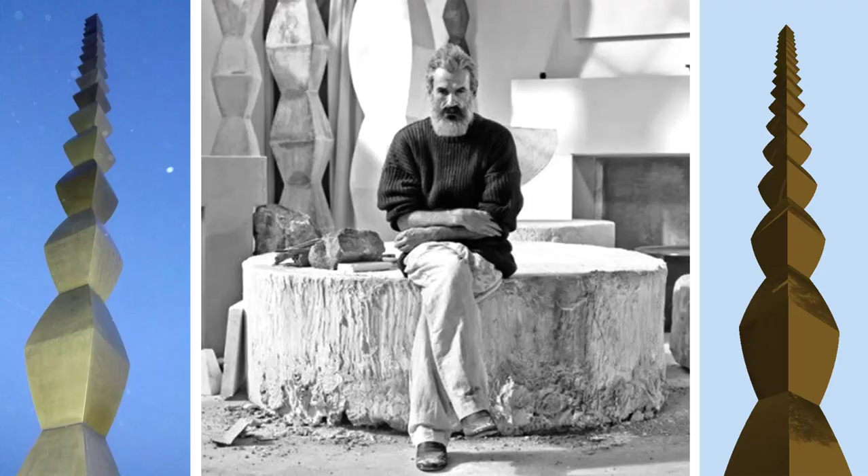Hi my friends, today we model this object of art made by the Romanian sculptor Constantin Brancusi.

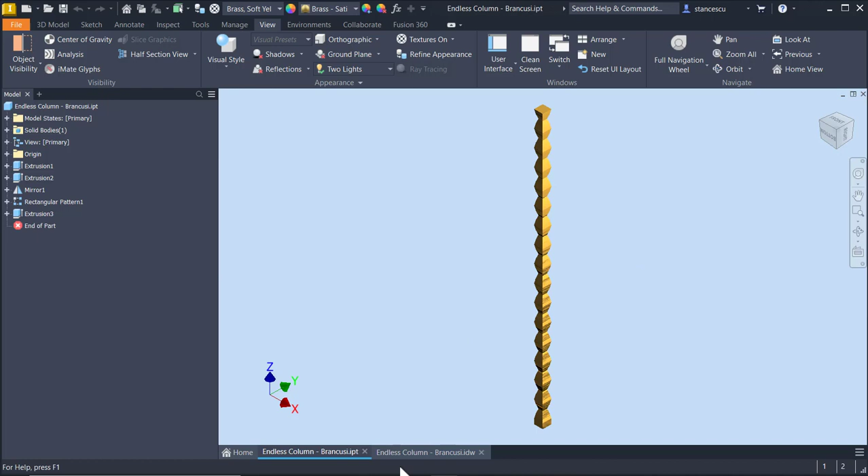The drawing is here. The name of the sculpture is the Endless Column, in Romanian coloana fără sfârșit, which is placed in Târgu Jiu, a town in Romania. It was made in 1938. Dimensions are here, we'll discuss about them.

But now I want to show you the author of this art object, Constantin Brancusi, who is a pioneer in modern art.

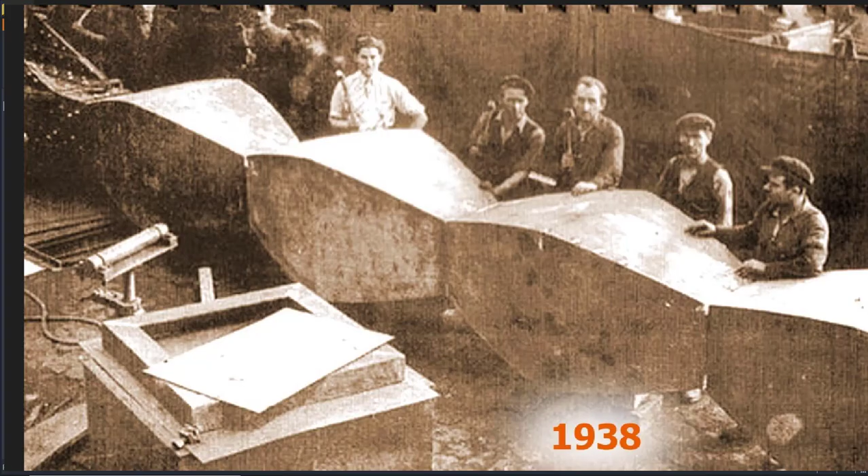This is the column placed in a park of the town Târgu Jiu. You see, it seems to be endless. This is how it was created by workers in metal, finished in 1938.

Another masterpiece of Brancusi is the Gate of the Kiss. Gate of the Kiss is in the back. This alley is the Alley of Chairs, and this is the Table of Silence with 12 chairs around. You can see that this seems to be a clepsydra, as well as the column.

All these masterpieces are placed in Târgu Jiu on a single line. Here is the column, here is an Orthodox church. It was the motive for Brancusi to create these sculptures: the Kiss Gate, the Chairs Alley, and at the river Jiu, the Table of Silence.

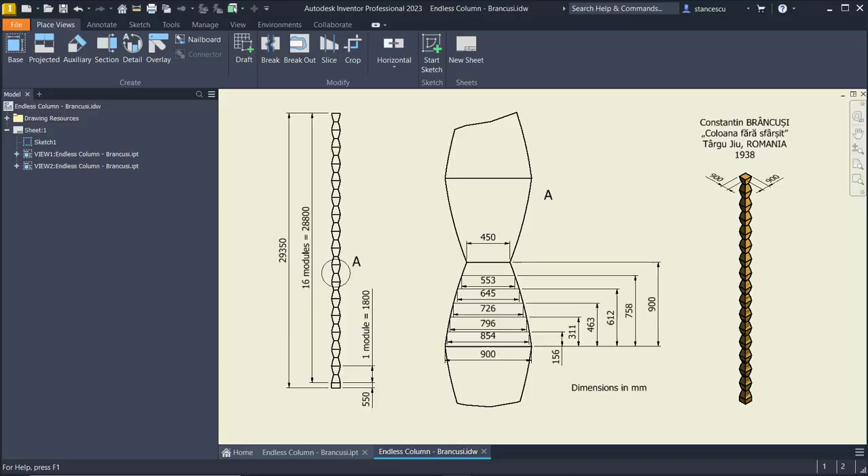Before moving on to modeling the column, please watch a short clip. It is a sequence from the film named Film Prezentare Gorj by Radu Tora, which you can find on YouTube under this name.

The Romanian Constantin Brancusi from Gorj, considered the father of modern sculpture, gave Târgu Jiu an invaluable creation. A symbol of the victorious passing through the gate of life, the Kiss Gate seems a passing gateway toward another realm. The motif of the union between man and woman was polished by Brancusi into the essence of the idea of kiss. There are 12 clepsydras at the silence table, 12 stools, one for each hour of the day or night, one for each apostle, and in the middle a round table, perfect, brought from the ancient world of the Romanian village. The endless column is a world axis, meant to support the celestial dome forever, to elevate the spirit, to enter eternity. Brancusi said, 'Go, cuddle the infinity column with wide open palms. Then, raising your eyes, look at it, and you will thus know the essence of the sky.' Probably the best known creation of Brancusi, the endless column, is considered to be the top of modern art and also the artistic symbol of Romania. Admiration for his genius and the desire to know his origins guide many tourists to Hobița, the native village of the man who made Romania known all over the world. Brancusi Memorial House shelters interesting aspects of the village life in Gorj, the art of working wood, which is representative of the craft of carving, traditional beams and pillars in Gorj, which Brancusi based his creation upon.

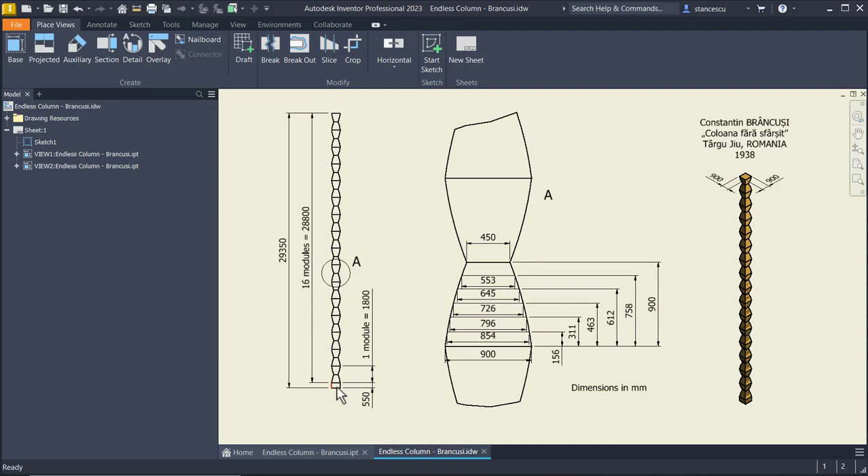Now let's start with modeling. We start by creating this bottom pedestal, which has dimensions of 900 by 900 by 550.

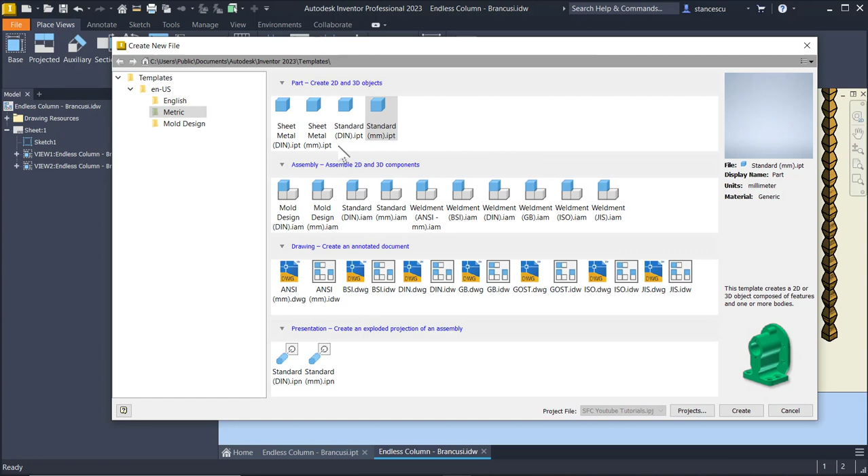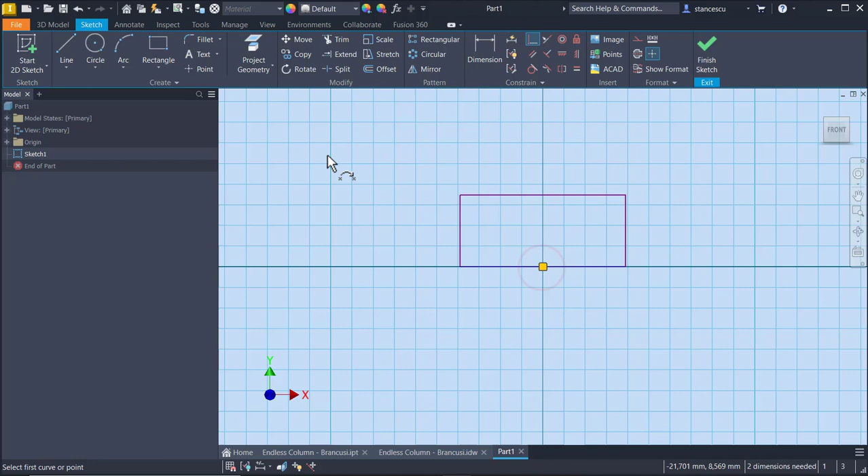We start by creating a sketch on a plane XY, a rectangle with its center point on the center point of the work. This is 550, this is 900. Finish sketch.

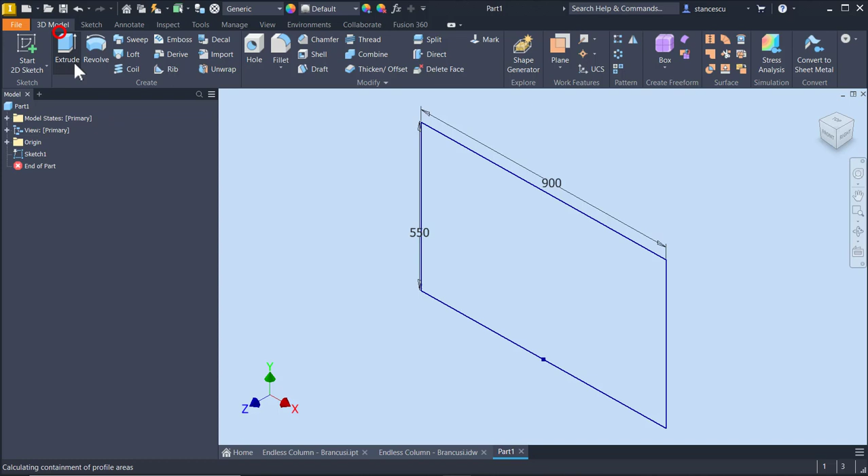Extrude, symmetrical, also 900, and we have the first feature.

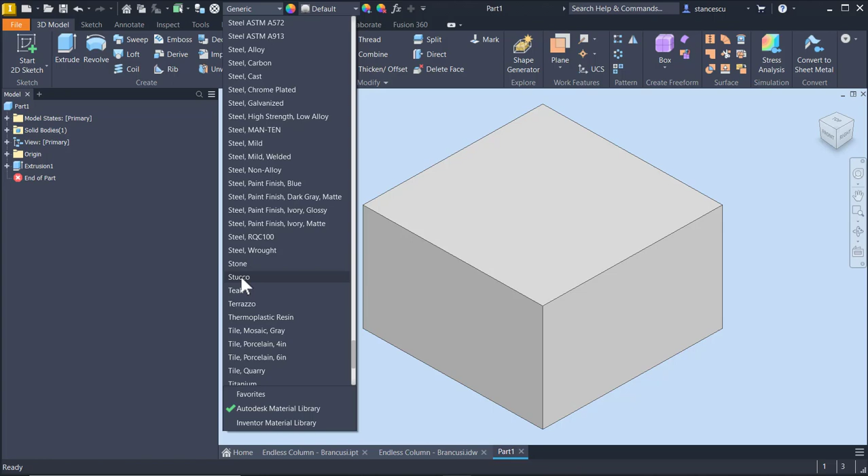We select here from Autodesk Material Library the material stone. Stone is right here, stucco. Stone is not so appropriate, but this seems to be like the material of the column.

We create a new sketch in the same plane.

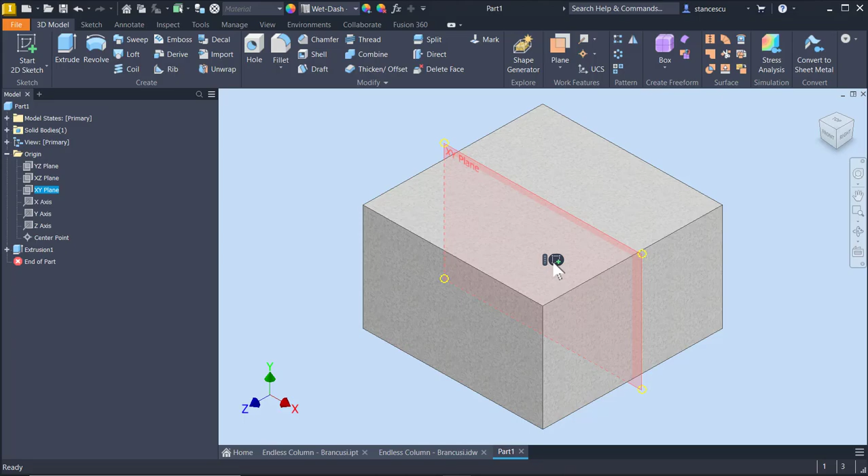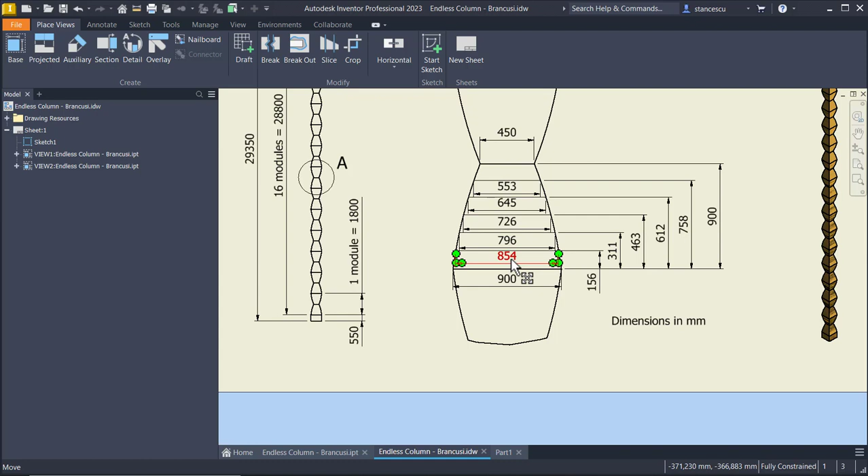We project this face, and now we apply these dimensions: 900, 450, and here there are five other dimensions placed at other heights.

We use this, so let's place points: 1, 2, 3, 4, 5, 6. Then we project as center line the axis Y.

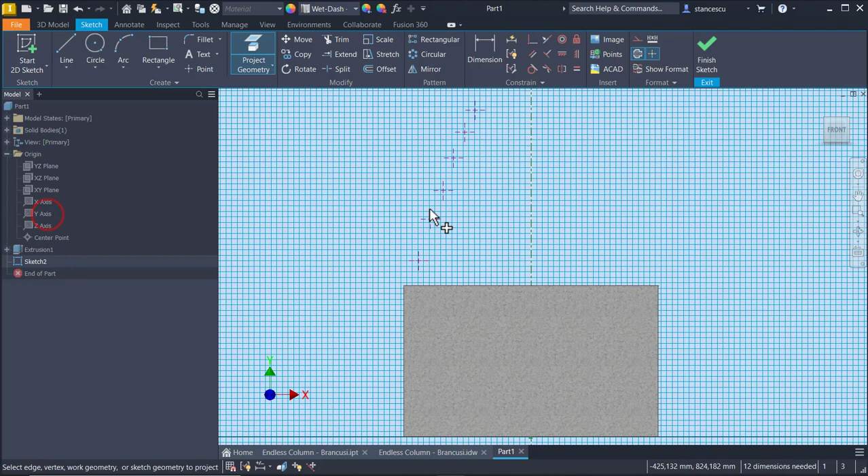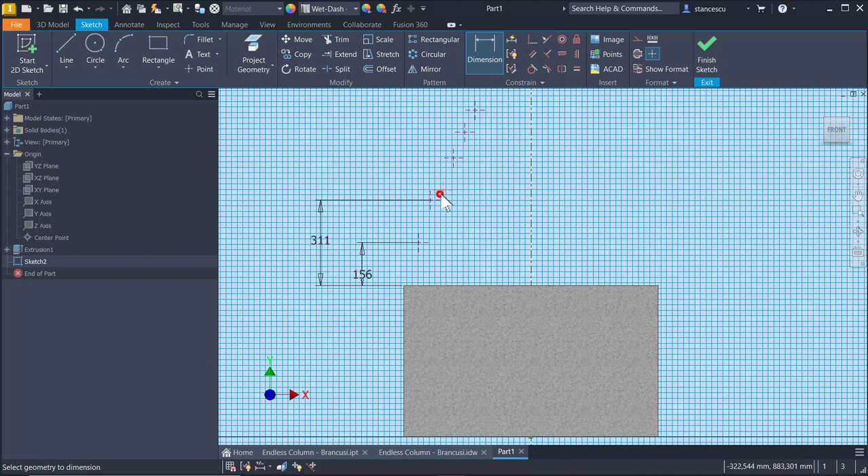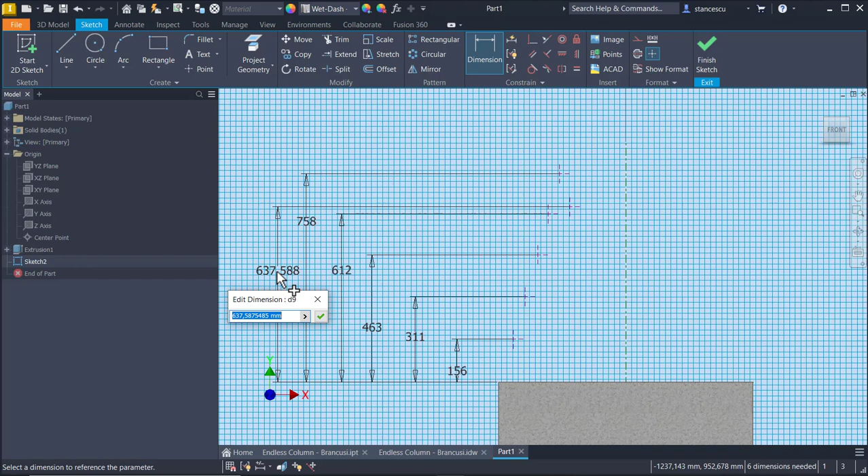You see the center line here. Then dimensions: this is 156, then 311, then 463, then 612, then 758, and the last is 900, because this is an important dimension all over.

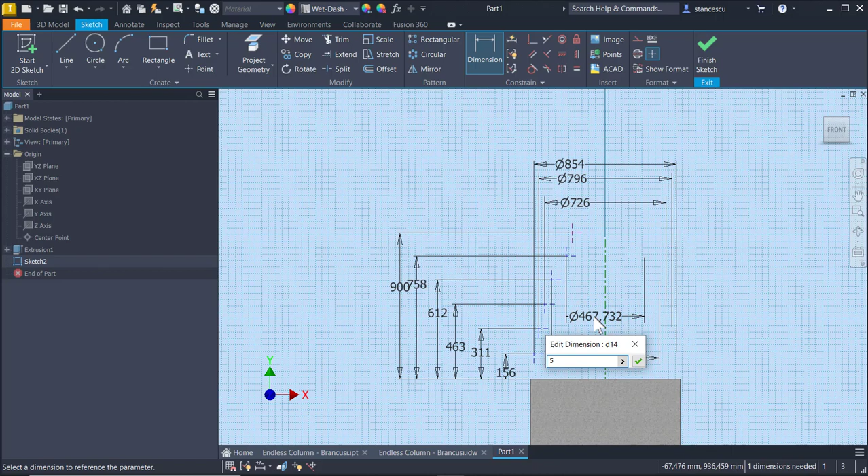Then we place distances from the center: 8, 5, 4. Then 7, 9, 6. 726, six, 4, 5, 6, 4, 5, 553, and half of 900, which is 450.

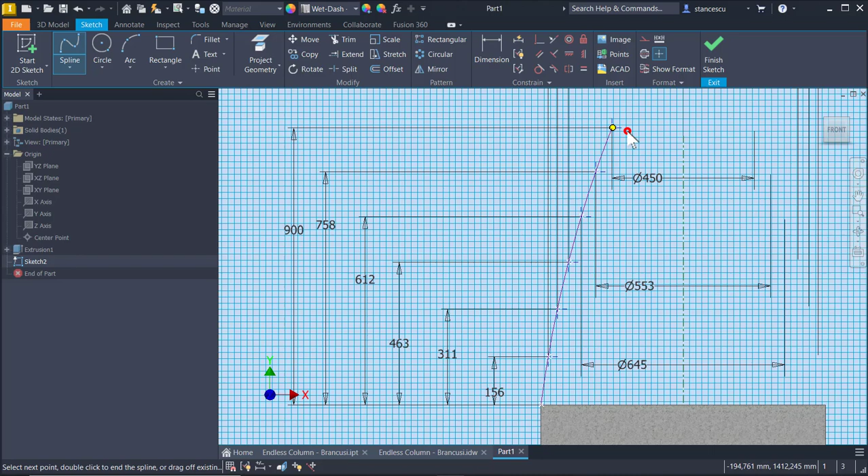That's all, fully constrained sketch. Then we use spline interpolation to connect all these points. You'll see that Brancusi had a continuous nice curve here because he used a spline, of course, from wood.

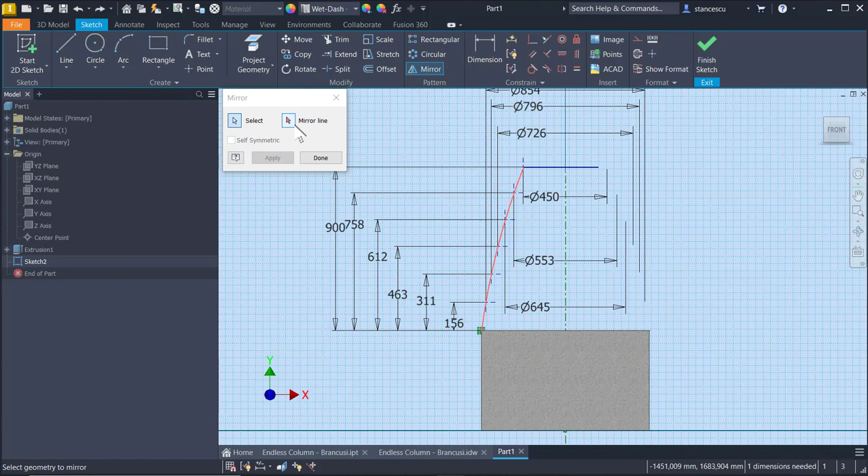Then another line, horizontal, mirror this spline about the axis, apply. Now I selected a point, Ctrl Z, mirror this spline about this sketch, and then extend the dimension.

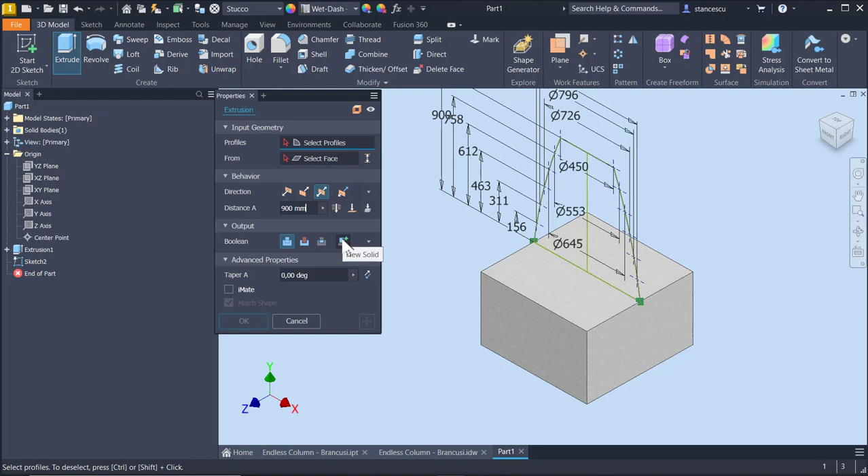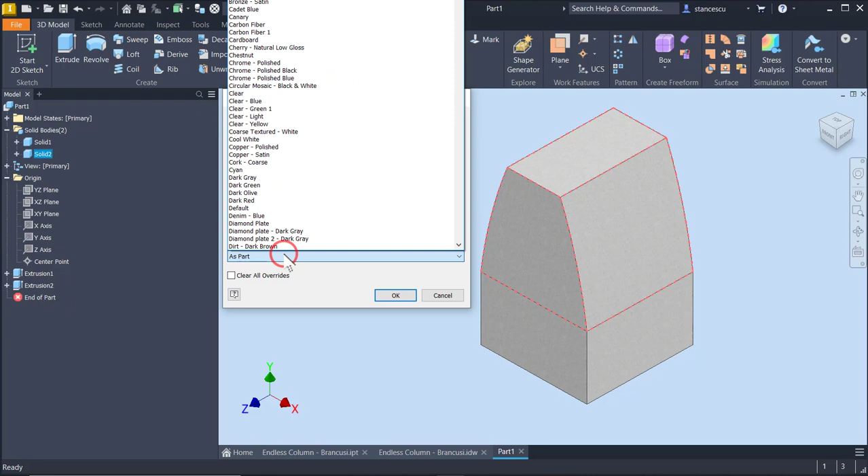Finished sketch. Now we have a close contour. We apply extrude symmetrical on 900, exactly as it was before, but be careful, we create a new solid. You'll see why immediately. We select the two halves and we have the next volume. You see we have two solids here, and I want to emphasize this aspect by applying red color.

Good. We create a work plane based on this edge and this edge, diagonal placed. Why? Because we want to apply mirror as solids, not as feature. We select the solid, this is the solid, and we select the mirror plane. You see, I selected here a new solid, not combining with the previous one, the red one.

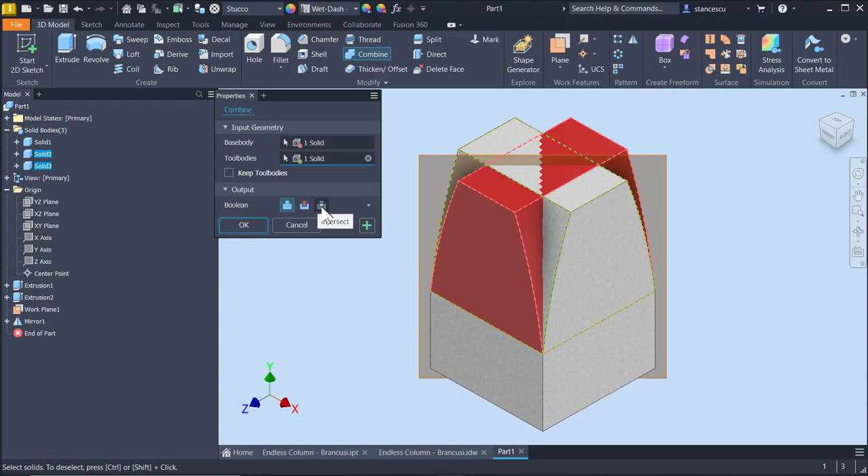Okay, now we combine the two by selecting firstly the red one and second the yellow white stucco one. But we are very careful not to join, not to cut, but to intersect the two bodies. Okay.

You see that we have now the first module, half of the modules which will be created.

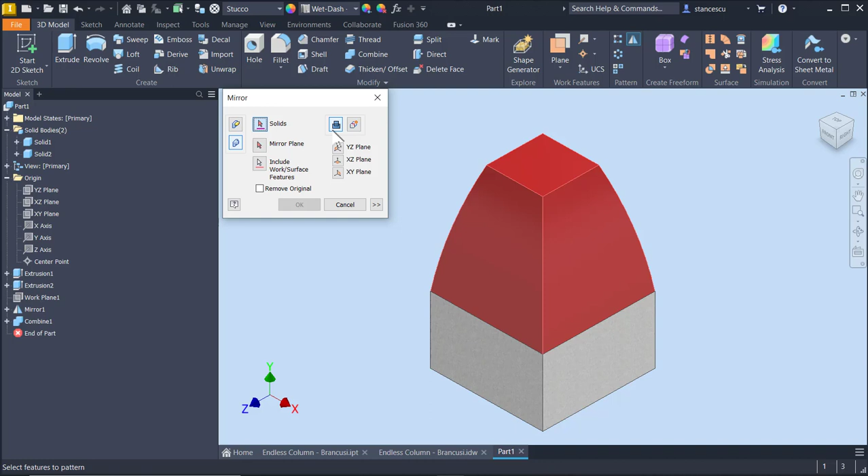We apply again mirror of the second solid, again as a solid, but now with join, not a new solid. We select this one and the mirror plane, which is this. You see now what I talk about.

Now we have two solids. The first one is the basement, or the postament, and this is a module. A module is clepsydra, not egg.

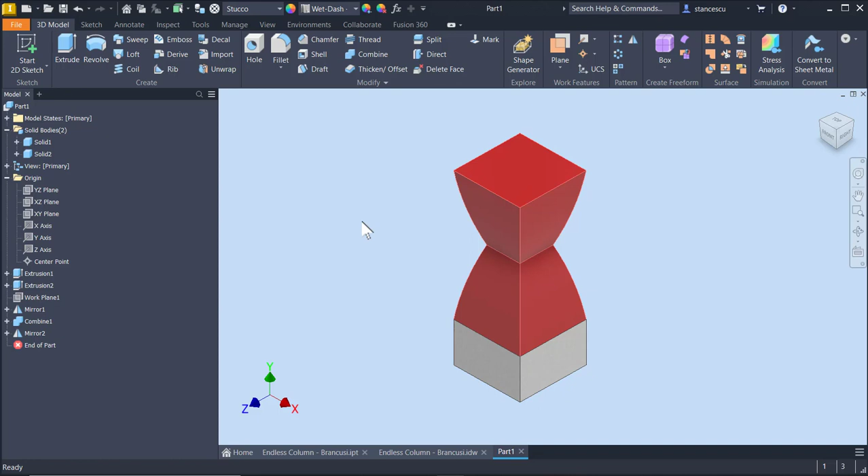Okay, you see, we have to multiply this clepsydra in 16 instances. Nothing simpler. We apply rectangular pattern, we select the direction, we select the feature.

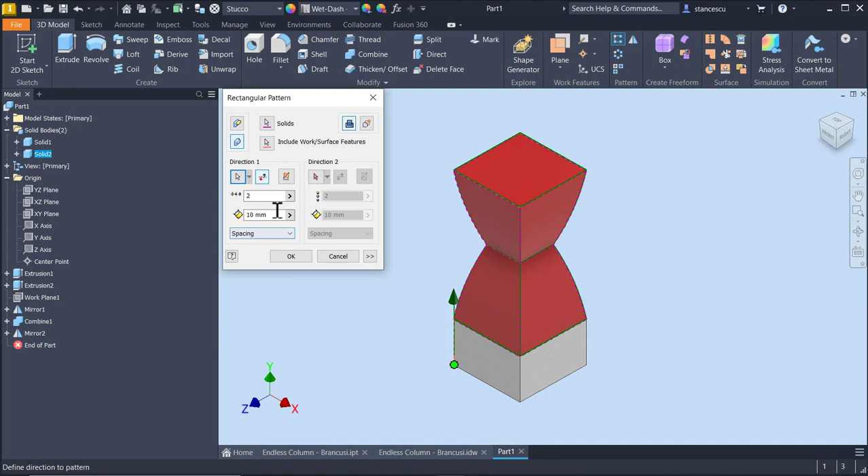We select the object, my friends. This is the object. And with join, direction is this one, but the other orientation. The number is 16, and the module is twice of 90. 90 multiplied by 2, 180, not 90.

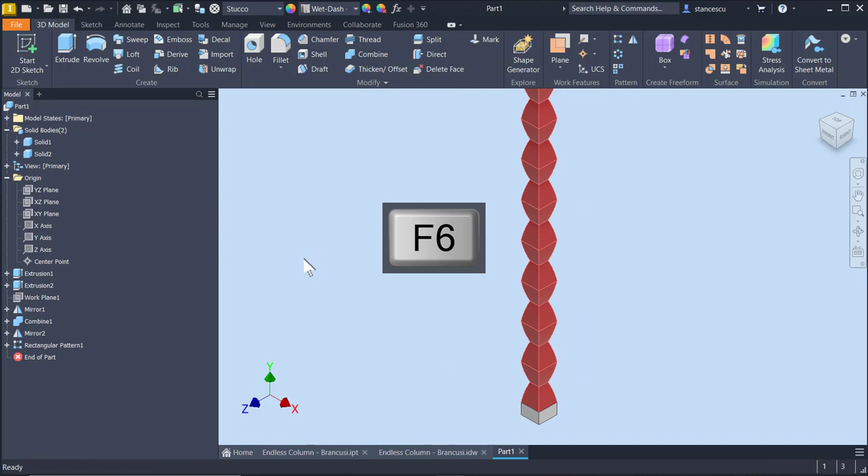Okay, now we have the full column. We combine by selecting firstly the bottom body or base body, and then the other modules, so that we have the column. It is...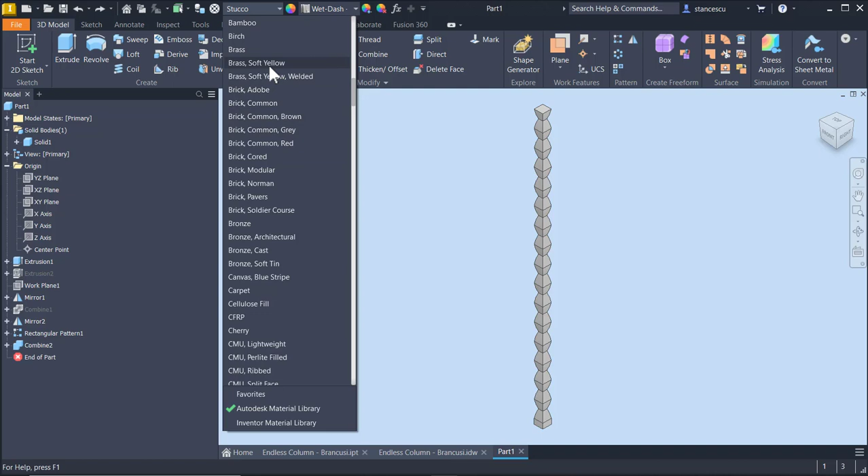As you saw before, Brancusi made this column not from stucco, from stone of any kind, but from metal. And at the end of the installation, the column was covered in 1938 with brass, using a Swiss procedure of the time. Let me apply this kind of cover, brass, soft yellow, and now we have the final aspect of the column.

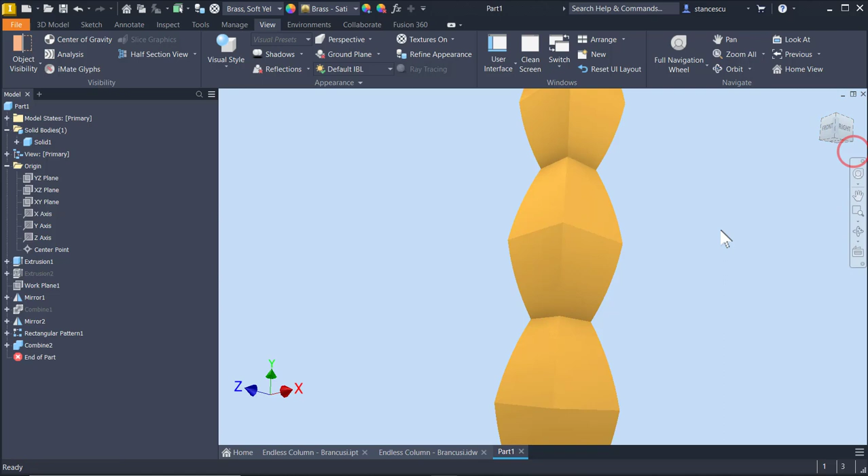You can eliminate edges to have the sensation of the real column. Go to Târgu Jiu. Put your hand on this art object and you will feel better, because you see here the infinite.